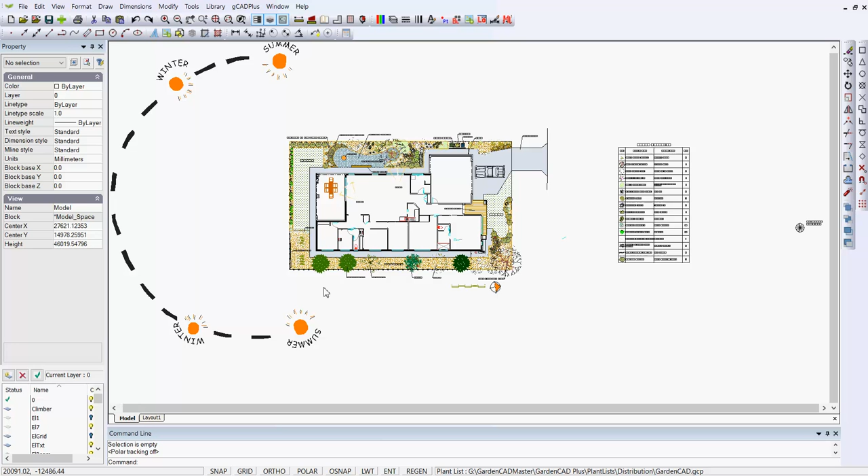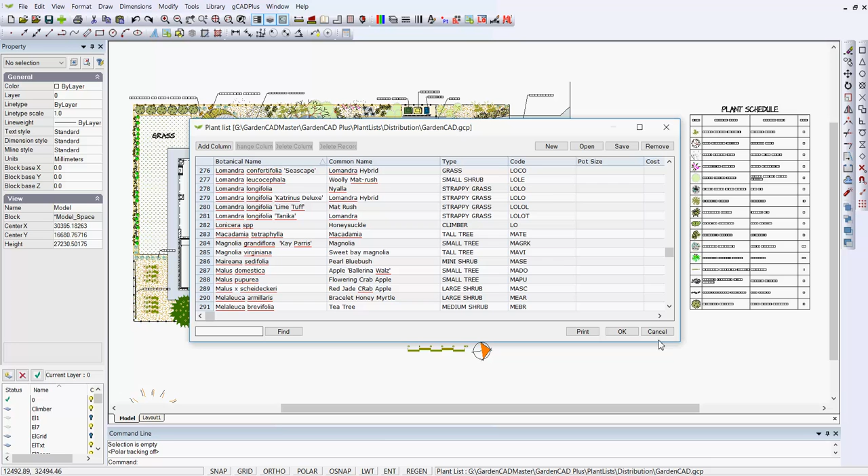gCADPlus gives you the ability to generate a plant schedule automatically, and you see one on the right here. And once you've tagged all the species you've used in your design, and we do that by working through our checklist, our GCP file, our GardenCAD file that we've associated with this drawing, and we've assigned different symbols to individual

species. You have the ability to zoom in, and if you select any symbol in the drawing and look down here in the bottom of the properties box, you can see that the botanical name, common name and the code that's been assigned are visible in that pop-up.

But what I wanted to illustrate was that you can store additional information with the drawing. For the sake of argument, we could store information about crushed gravel that's going to be used in this zone through here. So let's zoom in a little. Storing extra information with symbols is referred to as extended data.

And down in the status line, you'll see an ENT switch. And if I put it on now, it goes red to indicate that it's on. And I move over to this little dot that I put on top of the crushed gravel. You can see that the gravel is paving.

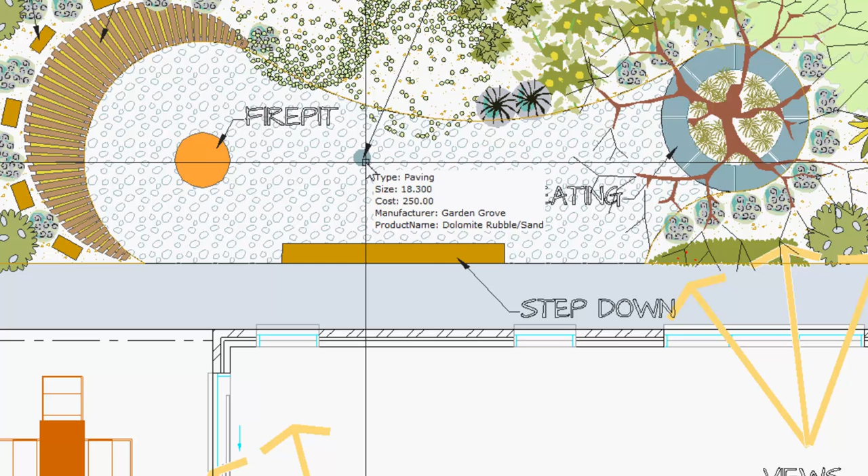Its size, 18.3 metres square, the cost of 250 from a manufacturer called Garden Grove, and the product name is Dolomite Rubble Sand, so that's going to be put through that area. The same applies to, say for the sake of argument, this custom curving piece of furniture.

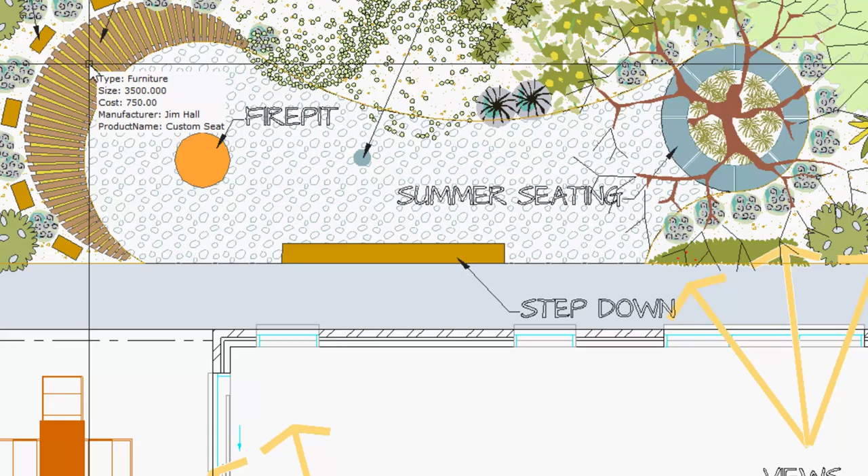Its size 3.5 metres, its cost $750. The manufacturer is a custom builder called Jim Hall, and obviously it's a custom seat. So we're storing all sorts of information in the drawing.

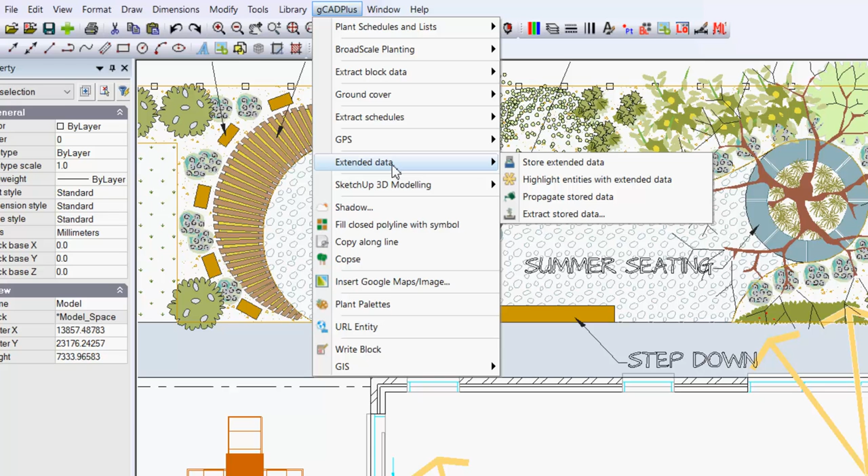The information is applied to any entity, be it a species or an irrigation line or furniture or whatever, via the gCADPlus and Extended Data drop-down menu. And we can say Store Extended Data, and we're prompted for selecting the entity to edit the data.

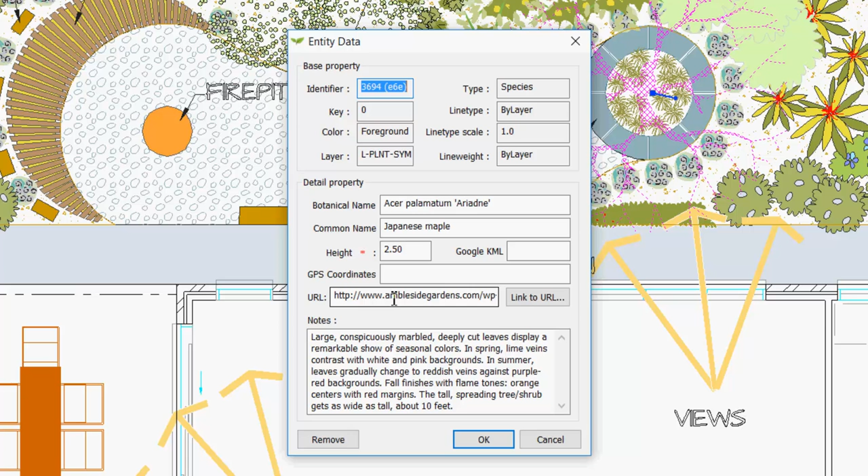And let's pick this tree, this feature tree, and it's already had the data associated with it. So its botanical name is there. It's the Ariadne form of the Japanese maple. Its height is estimated at 2.5 metres. There's a link to the URL to a photograph of it, and then there are some notes. And this can be as extensive as you like.

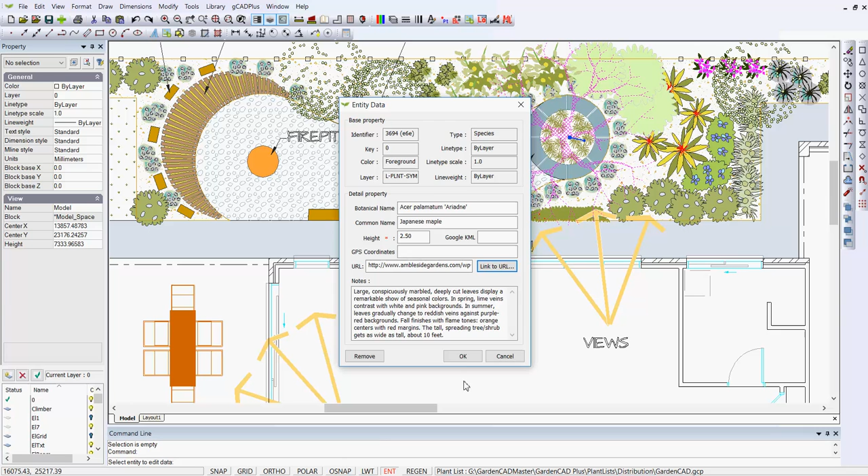You might, if you were managing a large estate, store the Google KML data or even the GPS coordinates of the location of that tree in your large-scale development. So if we clicked on link to URL, that would jump straight into our browser and we could see the image that has been stored with it. So let's return to gCADPlus and I'll close that.

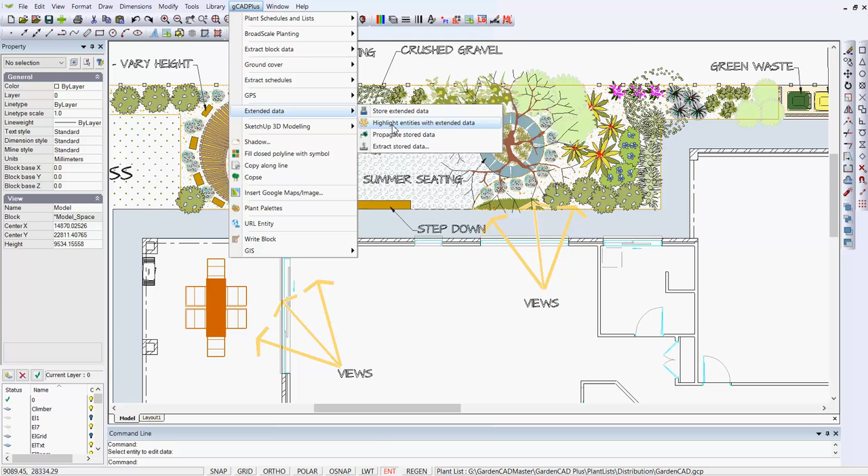So can you see that each of these species has extra information with them, and symbols and so on all can have it. To see quickly the symbols that do have extended data, we can say highlight the entities. So here are all the entities that have got extended data.

What that means is that as I hover over this species here, the symbol there, let's unselect all, and because my extended entity switch is on, when I sit it here, I see that this is Lavandula angustifolia vera, which you can get from that properties box as well, but I've got lots of additional information, certainly in the notes area, and a link to the JPEG file that illustrates that species.

So I hope you can see that you can store lots of extended data. There's also an option to propagate that data. Notice that as I move over the top of another symbol for that lavender, it doesn't have the pop-up. The pop-up's only associated with this one here.

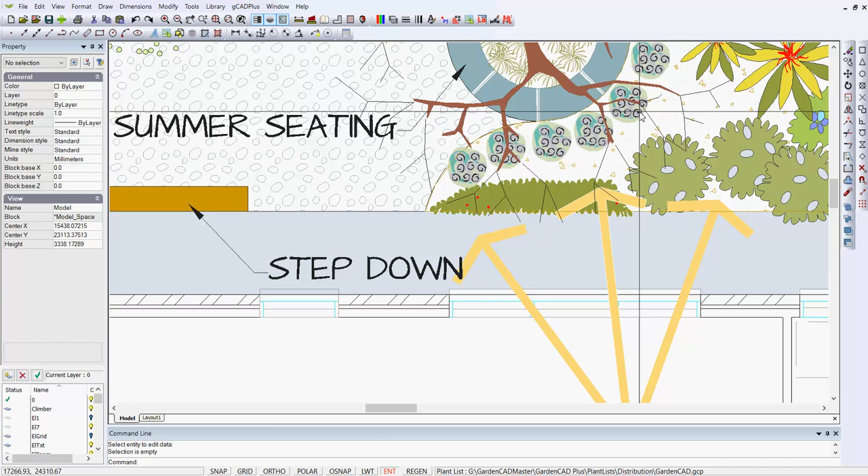If I wanted for some reason to make sure that every instance of that symbol does have the extended data, that's what the gCADPlus extended data propagate stored data does. So let's do it. And now I hope that as we move over here, no matter where we let our mouse hover, we get that same extended data information.

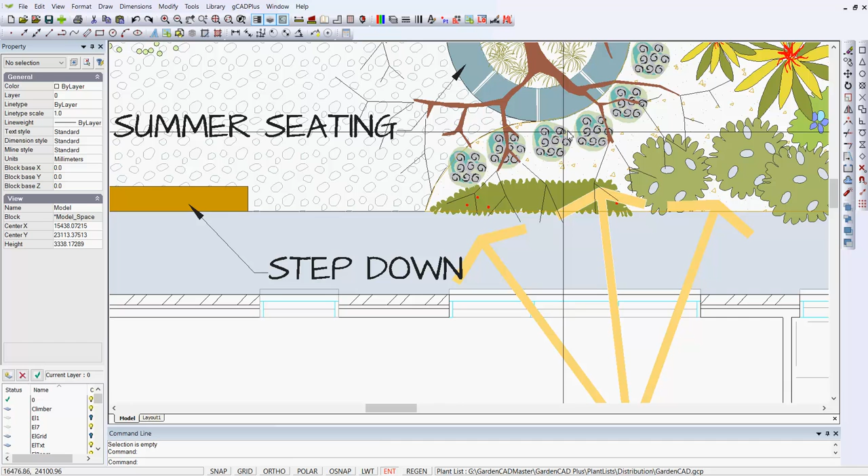And finally, we can go to extended data and extract the stored data. So all the information that's stored as extended data in the drawing can be pushed to a CSV file which can be read by Excel. So I hope that gives you some good background on extended data in the gCADPlus environment.